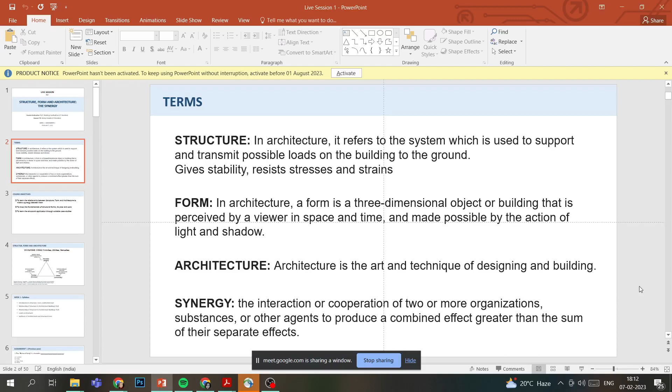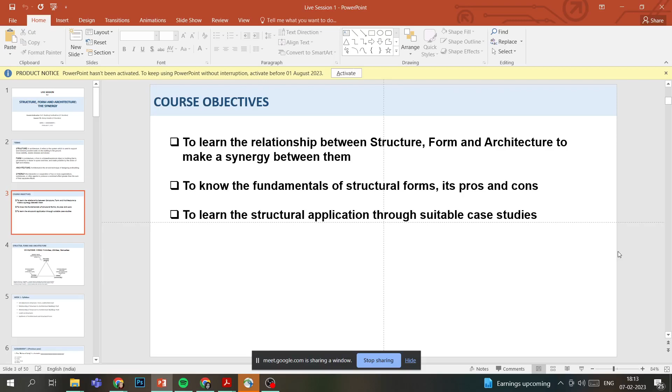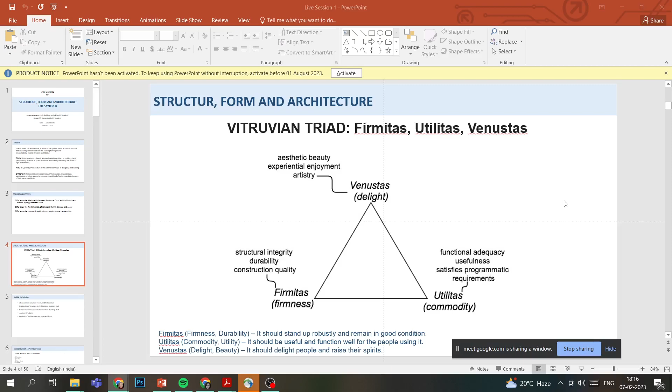And then I will admit this person.

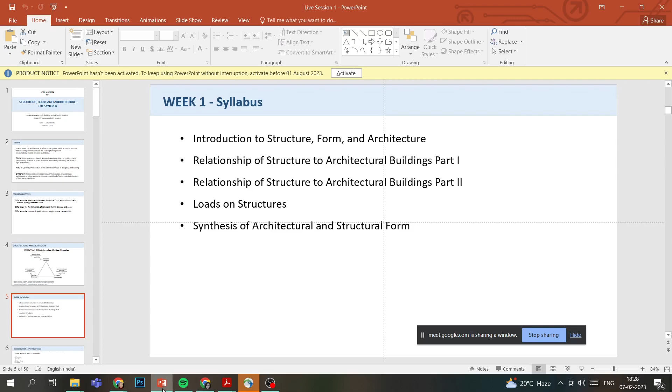Now, moving forward, we will be doing the previous year questions. And again, I am clarifying that these questions are the previous year's assignment questions, not this year's assignment questions. I will not be solving this year's assignment questions. I will only be solving previous year assignment questions to help you understand these assignments and questions, and to help you with this NPTEL course. Today I will only cover last year's assignment questions, and if time permits, from next session I will try to cover 2 years of questions, so that I can cover maximum questions for you all.

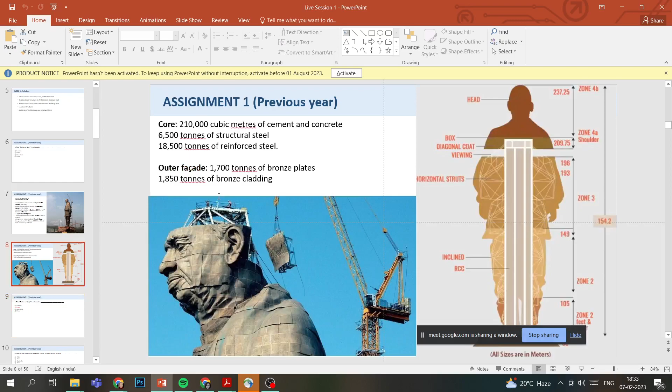It is situated in India. The Statue of Liberty, which we saw in comparison here, is located in New York. It was gifted to America by France, and there is another statue similar to this existing in Paris. That's why these options were given.

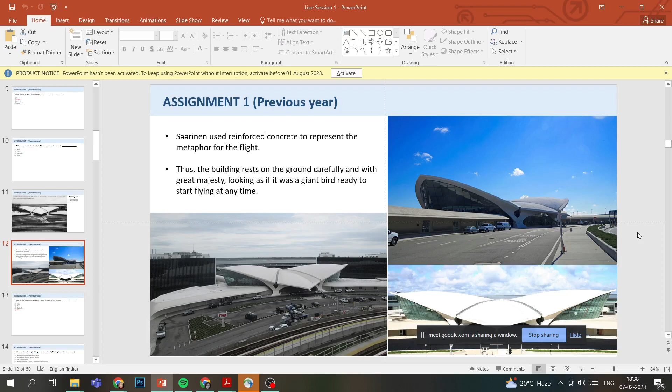The design philosophy the architect used was to give this concept that it looks like a giant bird ready to fly. He chose a bird because he wanted people to associate with the idea of flying. That's why the building feels like it rests on the ground carefully, looking like a giant bird ready to fly at any time. The whole building is made of reinforced concrete, representing the metaphor of flight. The philosophy of the architect was to represent the metaphor for flight. That's why he chose a bird, executed this form, and got this whole thing built. So the answer is D, bird.

Third question: which of the following buildings represents visually floating in architectural concept? First I'll show the images of four buildings.

So again, the question was which of the following buildings represents visually floating in architectural concept? I have shown the images of four buildings, but to answer this we should be aware of the concept of visually floating, so now I will talk about that. As I mentioned before, the architectural concepts covered in this NPTEL course are order and chaos, stability and instability, static and dynamic, grounded and floating.

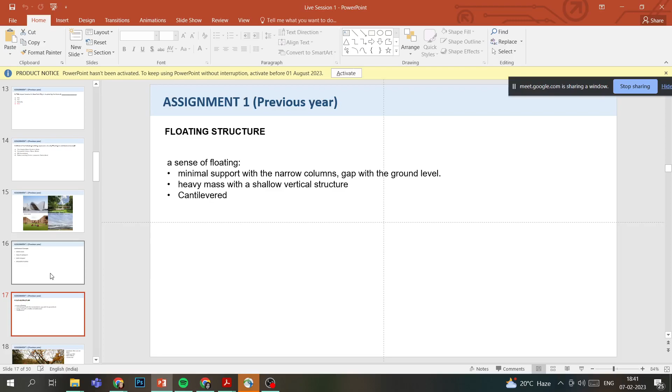So again we go back to the question: which of these four structures represents visually floating as an architectural concept? When we look at the buildings, the Heydar Aliyev Center in Baku, IIM Ahmedabad, and the Rolex Learning Center all are sitting on the ground. While when you look at the Farnsworth House in Plano, Illinois, you can see that the house feels like it's floating in the air because it is supported on such thin columns and there is a gap between the ground and the plinth level.

It was designed by Mies van der Rohe from 1945 to 1951. It is located in Plano, Illinois. It was built on a 60-acre site as a holiday home. So the correct answer is Farnsworth House, Plano, Illinois.

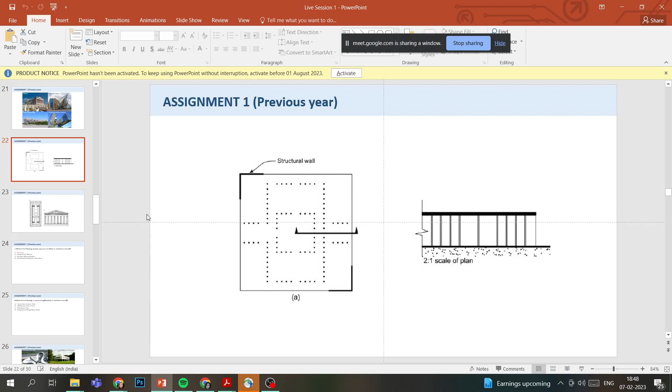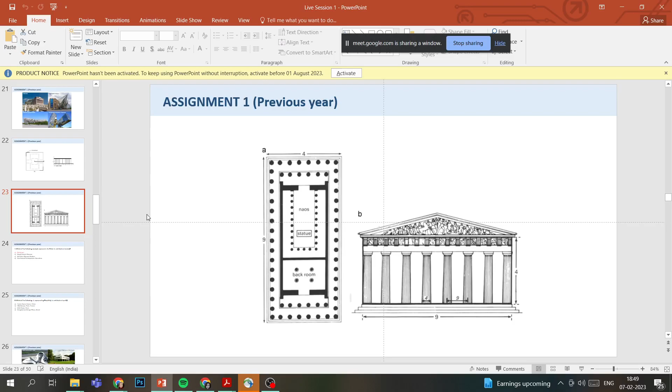And when you go to the Parthenon, you see very ordered columns, all arranged equidistant. Everything is very organized and structured. The Parthenon is structured in the form of its plan, it is ordered in the form of its elevation and its view. So it is an example of an ordered structural form. So the answer is Parthenon.

Moving on to the next question: which of the following represents simplicity in architectural quality? Simplicity is again one of the architectural qualities that has been covered.

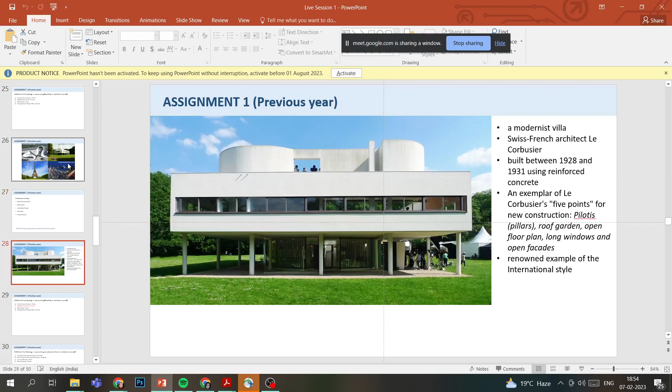You can see very well from the images provided that it is a very simple or regular looking house, so that's why it is an example of the simplistic form of architectural quality. So again, the question was which of the following is representing simplicity in architectural quality, and the answer is Villa Savoye.

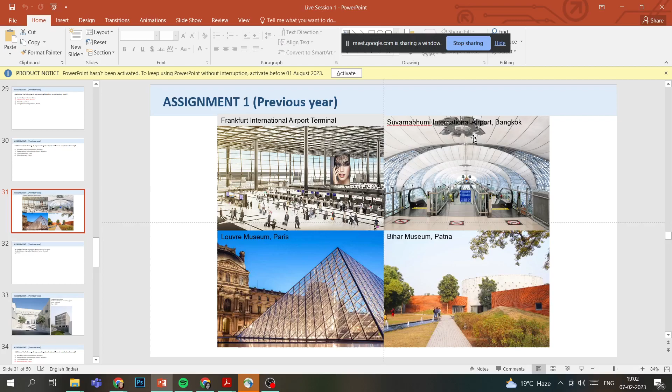And when you look at this building, the Bihar Museum, this is located in Patna, Bihar. It was designed by Maki and Associates. Maki and Associates are very famous Japanese architects. The area is 25,410 square meters and it was built in 2018.

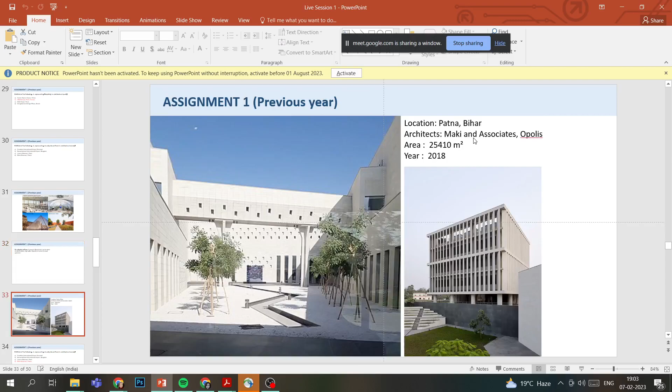So when you look at this building and compare it with all these other examples, you realize that the Bihar Museum is actually closed and all these others are open. So the correct answer is the Bihar Museum. It is a very visually closed architecture. The architectural concept that has been used in this building form is that it is very visually closed.

It is characterized by a lot of walls. There is not a lot of glass used, not an open floor plan used, so it is not characterized by openness. It is characterized by closedness.

I'm really sorry. Speaking so much is triggering my throat. I'm already not well. I'm really sorry for the disturbance.

So, question number 7. Below are some of the examples. This question came with images. I have not added these images. This question is asking which of these buildings represent visually lightweight architectural qualities, and then they have given various options: that only the first is representing that, or second and third, or second and fourth. So to answer this question, you should be aware of this term, which is visually lightweight.

So visually lightweight is again one of the architectural qualities. It is the opposite of heaviness. So what is a visually lightweight architectural quality? It should feel light when you look at that building, at some object, anything. You should not feel a very heavy mass or solidness. So it should feel light. It should be visually feeling light in the interior form.

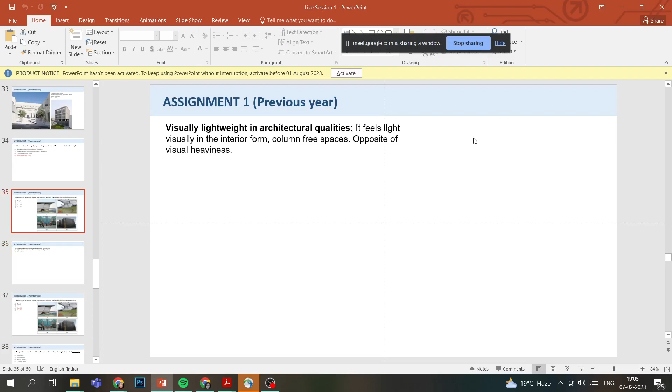Why is it feeling light? It is feeling so light because of a lot of daylight coming in, the use of a lot of glass, the presence of no columns in the whole area. The entire space feels free to walk in. It is not supported by huge or heavy columns. So the correct answer is C, second and third, the stadium and the Frankfurt International Airport.

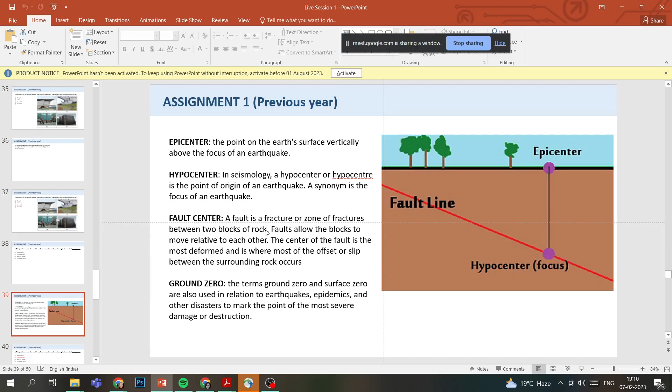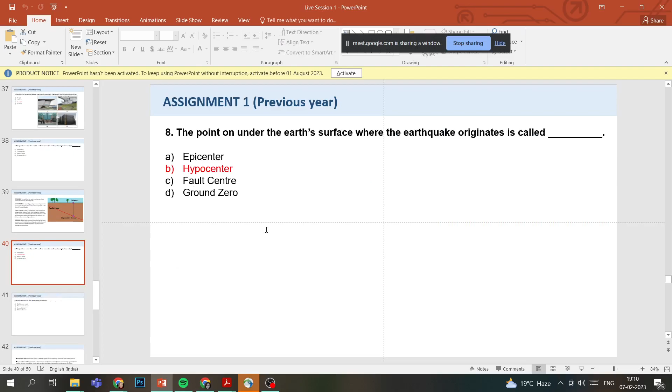So, we learned about all four of these points. So, again, the question was the point under the Earth's surface. It's not saying the point on Earth's surface, it's saying the point under the Earth's surface where the earthquake originates. So, the correct answer is hypocenter.

Question number 9. So ringing a church bell repeatedly can create settlement load, resonance load, impact load, or thermal load. Again, all these are part of dynamic load, which I just mentioned when I was explaining the earthquake point. So settlement load and resonant load, they both are dynamic. Impact load is also dynamic. And thermal load is actually a kind of temporary load, but it is not exactly a dynamic load.

So, to answer this question, we should be aware of all the terms so that we can know which one to write and which one to not. So, the terms are, sorry, settlement load. So, all the loads that I'm mentioning here are associated with your building, these are all kinds of loads that are associated with a building specifically.

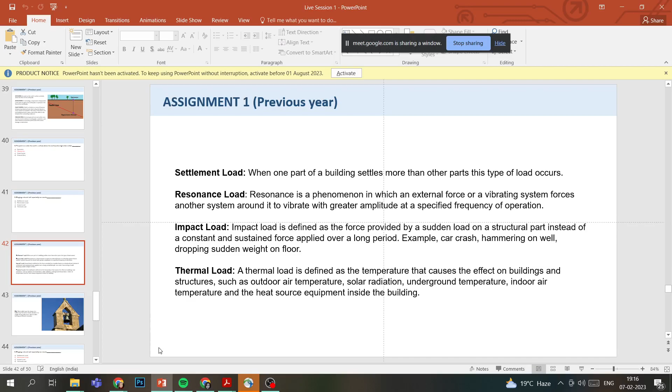So the question was that ringing a church bell repeatedly can create which of all these four kinds of loads. So when you talk about bells, a church bell is like a shape of a hollow cup, and when you strike that bell, it vibrates, and because it vibrates, it resonates. So when we strike a bell, it will resonate, it will create a resonance load on the building. So that is why the answer is resonance load.

Last question. Paul Klee Museum is an example of arch structure, membrane structure, shell structure, or folded plate structures. These all kinds of structures are covered in lecture 5 of week 1 lectures. So before we go forward, we will see how actually Paul Klee Museum looks like.

So this is a museum that has been dedicated to Paul Klee. He was an artist, and 60% of his work has been displayed in this museum. This museum is located in Bern, Switzerland. It was designed by the famous Italian architect Renzo Piano, and it is characterized by the structure of corrugated steel deck in the form of arches.

So the four terms that were given here were arch structure, membrane structure, shell structure, and folded plate structure. So we will understand about all four kinds of structures to be able to answer this question. So arch structure, mostly everybody knows what an arch is. So arch is a vertical curved structure that spans an elevated space and may or may not support the weight above it.

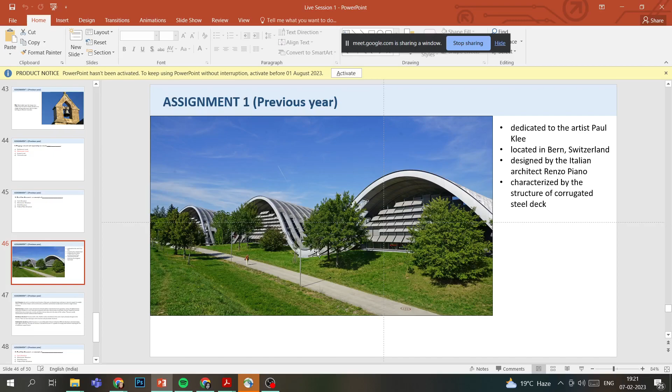So now when you look at the structure, you realize that there is a curvature, there is a corrugated steel sheet kind of thing that is going on in the shape of an arch. So then we realize that out of all the four examples that have been given here, this is an example of an arch structure.

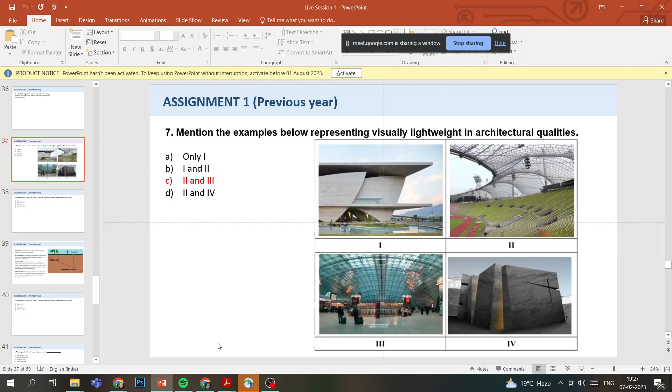So like I showed in this one example, this one question, this was the only question that was in the previous assignments which had the picture attached with it, so you can see an answer. But others, I have added those pictures for your understanding so that I could explain it in a better way and so that you could understand. So some question might have pictures attached with them, but most questions will not.

But all the examples that have been covered in these questions, as far as I have noticed, have actually been covered in the NPTEL course. So if you're taking the course, you will realize that these examples are there. So I think you will have to memorize these examples. You have to learn these examples of each kind of quality or form to be able to answer these questions.

Because you have to remember how this looks, how the form looks, how the structure looks, to be able to answer those questions. So these are very famous buildings around the world. So that I think you will have to memorize, because some questions might have pictures associated with them, but some might not. Sure.